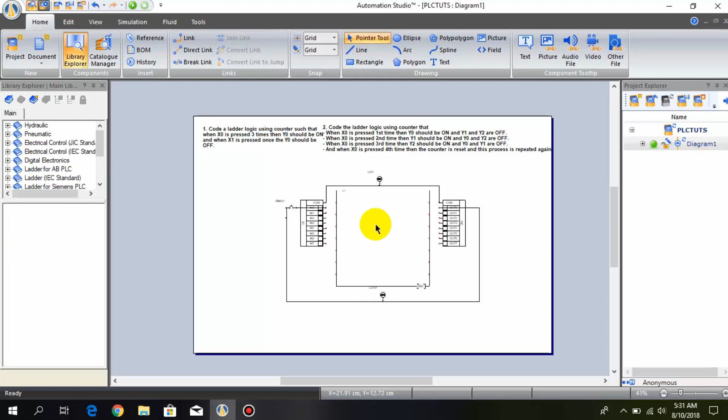The first question is: code a ladder logic using a counter such that when X0 is pressed 3 times, Y0 should turn on, and when X1 is pressed once, Y0 should turn off. We have to use two push buttons, one counter, and multiple NO and NC contacts. Let's begin building this ladder logic.

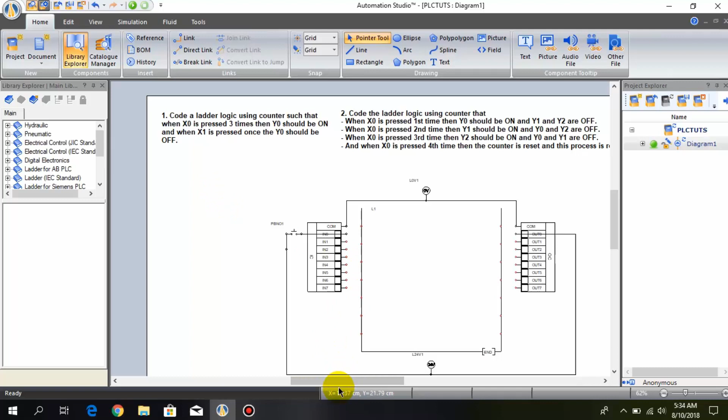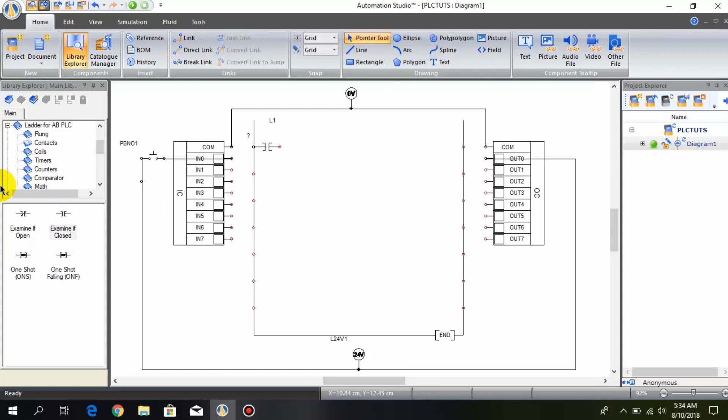First of all we need a NO contact, and we place it over here, and next we need a counter. I associate this contact with input 0.

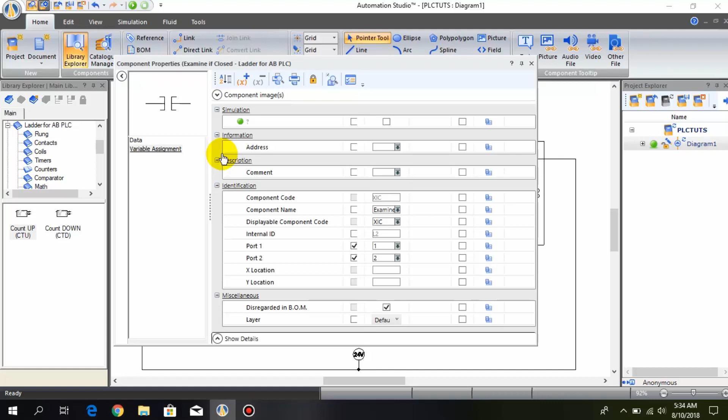In the question we have to count 3 times, so for that I have to change the preset of this counter, that is 10, to 3. I go to data and change this preset to 3.

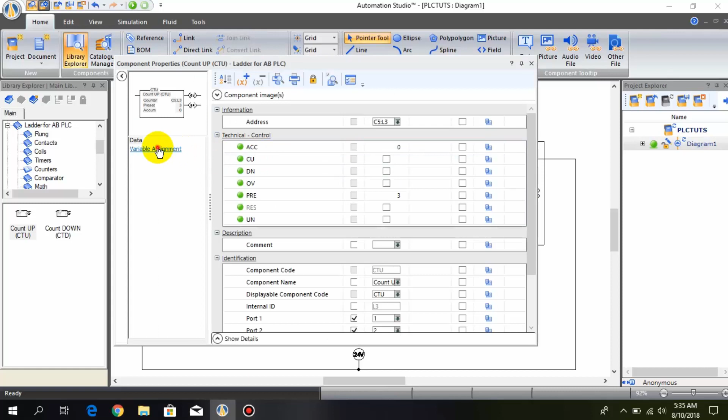I also have to connect the counting bit, CU bit, with output 0 in order to turn on the counter, and now we will add more contacts.

What will happen is that when the counter counts the third time, the output will turn on. For that I connect this normally open contact, and associate it with the DN bit, output bit, and connect an output coil that will be turned on. So I need an output coil.

When the DN bit of the counter is turned on, we have to latch the output. So we need another normally open contact, and I connect it over here.

We also have to reset the counter. For that I connect this reset coil in parallel with the output coil, so that when the output is turned on, the reset coil is also turned on, which resets this counter.

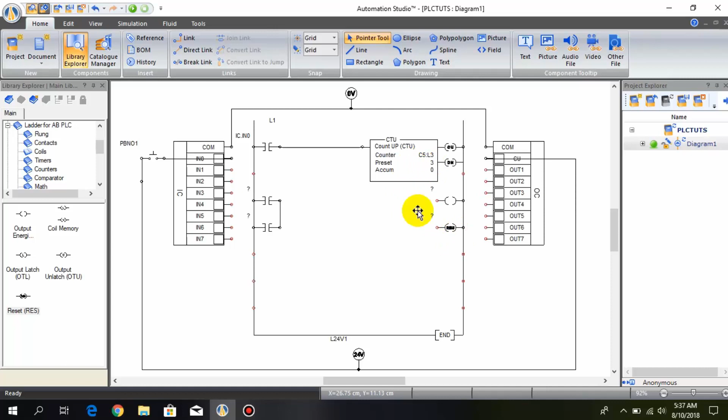Finally we need a normally closed contact, because we have to reset the counter. We also connect a push button so that when we press it, this normally closed contact becomes open, breaking the signal, and this output coil becomes unlatched. So I connected the normally closed contact over here.

So here we have done this part. The next thing we have to do is duplicate this push button and connect it over here, and connect the other end of the push button with input 1.

Make sure you have connected the first end properly with the 24 volts, otherwise it will create a problem and it will not work. Let's associate this contact with the DN bit.

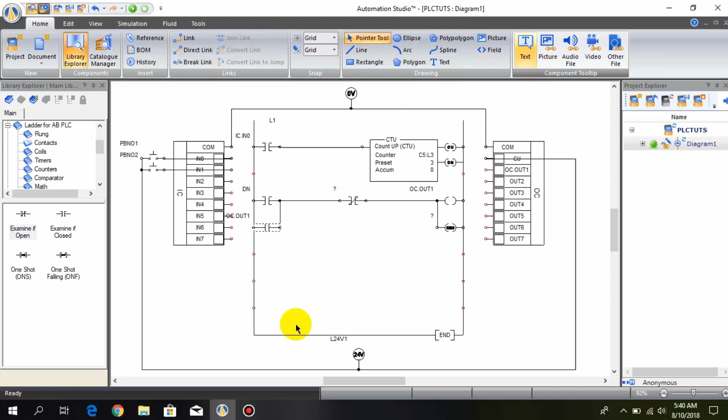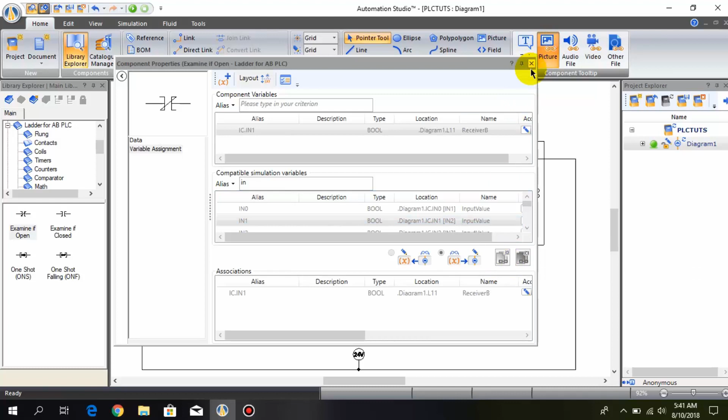This normally closed contact connects with input 1, and finally this reset coil. So we have done.

Let's simulate it. When I press the push button first time, you will see that the counter will count 1. When I press it again it counts 2, and when I press the third time, the output is latched and the reset coil is also turned on, resetting this counter back to 0.

When I press the second push button, the output is unlatched. So when I press it, the output goes unlatched. This is very simple logic, and I hope you understand.